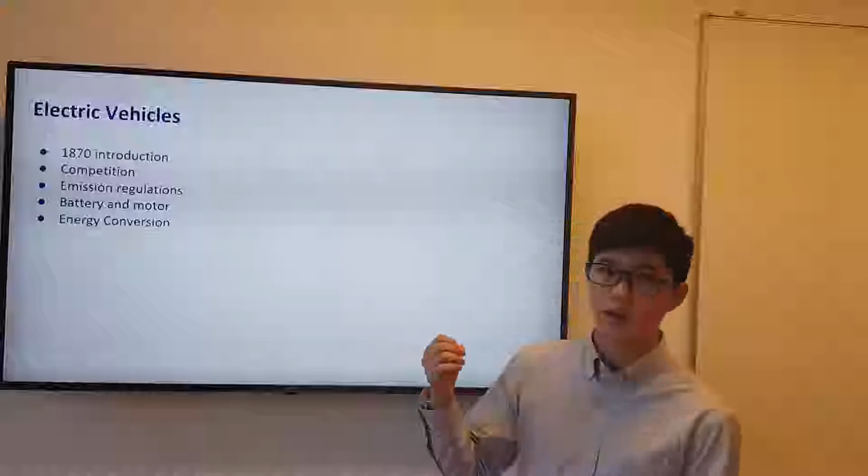Electric vehicles were introduced around 1870, and as the automotive industry became more packed, companies had to find a way to stand out, so they started innovating, leading to the production of electric cars. Add to this the fact that CO2 emissions were increasing, and governments were putting regulations on carbon dioxide emissions.

Electric vehicles run on a battery, and this battery powers an electric motor which then drives the wheels. It can be thought of more as an energy conversion system where the chemical energy in the battery is transferred into kinetic energy, driving the electric motor, driving the wheels.

It's also important to note that full electric vehicles weren't always present. It started off more as a hybrid, which is a combination of internal combustion engine as well as battery operation.

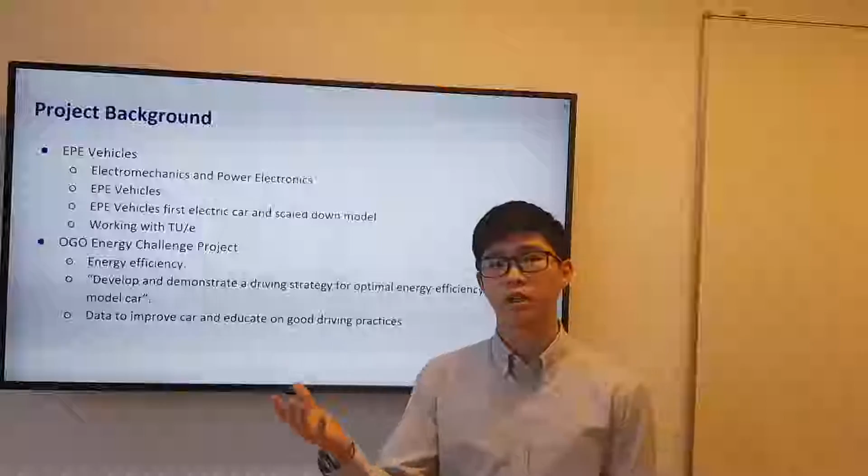This leads me on to our project background. So we have EPE and we have EPE Vehicles. EPE stands for Electromechanics and Power Electronics, and they are our host for this project. EPE Vehicles is a car manufacturing company and the customer of EPE.

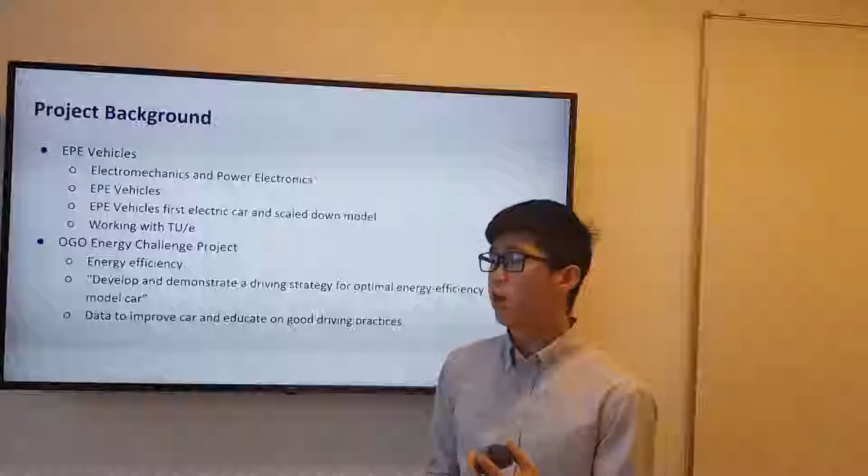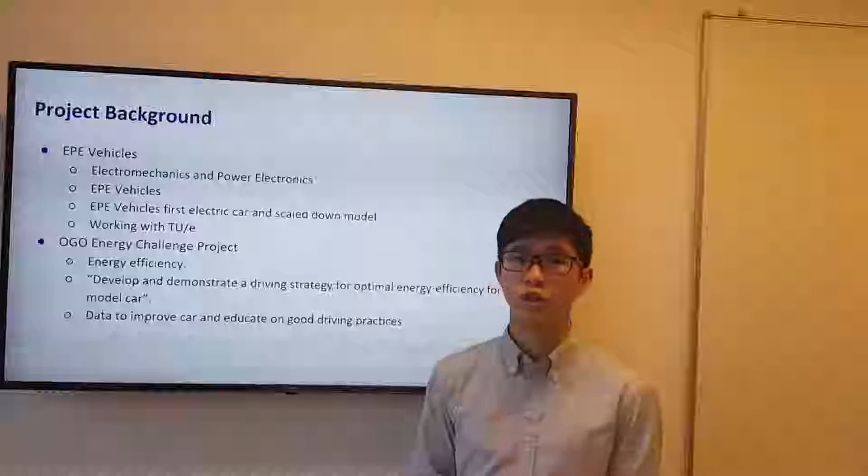EPE Vehicles has decided to produce their first electric car, and because this domain is new, the Chief Technical Officer, the CTO, has decided to produce a scaled-down model for testing purposes. Furthermore, the CTO has decided to pair with Eindhoven University of Technology, that's us, to research the energy efficiency of the car and driving practices.

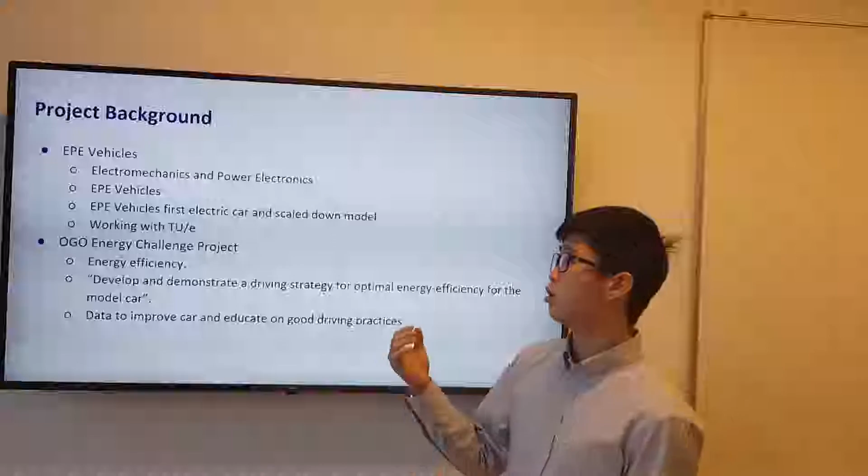So what is this energy challenge project all about? As the main selling point of our car is energy efficiency, our project goal is to develop and demonstrate a driving strategy for optimal energy efficiency for the model car. Using this, hopefully with our research, we can provide data to EPE Vehicles on ways they can improve the energy efficiency of their car, as well as educate them on good driving practices on the road.

As this is a very big project, we have decided to split it up into many departments, with each person having 2 to 3 roles. We feel this is important because each person will be able to concentrate on those roles and perform them well. Each department will have only 2 to 3 people, and we feel this is important because it maximizes communication.

To keep up to date, we have weekly meetings where we stay updated on progress. We talk about things such as what we've done in the previous week, any problems, we update our goals, and discuss ways in which we can fulfill this project. We also do peer reviews, a way for each individual to review how well they're doing.

So onto the content of this presentation. We start with the tank-to-wheel analysis. We have the communication system, the speedometer and LED system, and the driving strategy.

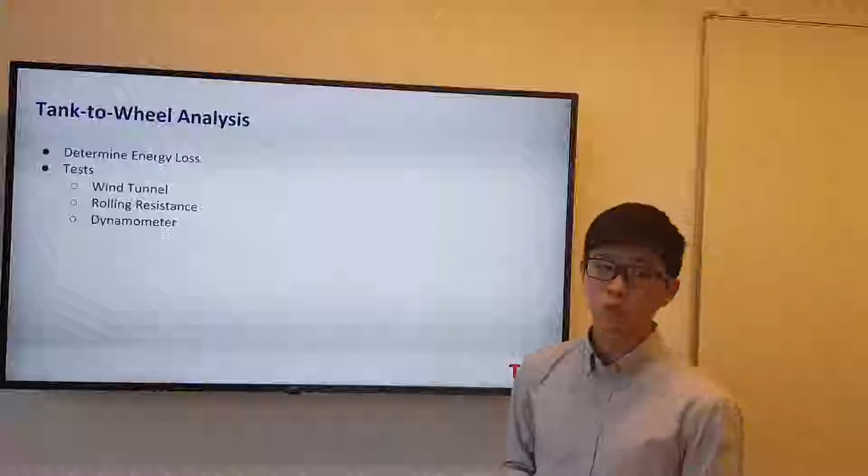The tank-to-wheel analysis is basically the determination of the energy losses of each part of the car, as well as the total loss of all components of the car. To do this, we have broken it down into 3 tests.

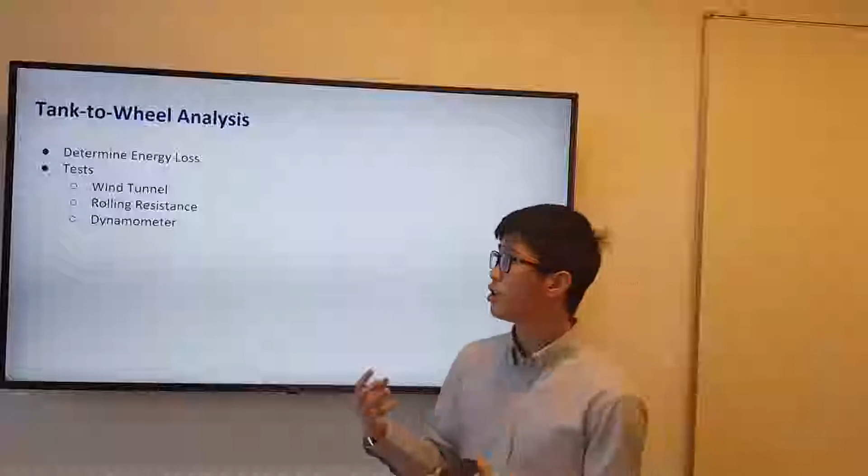First, we have the wind tunnel test, which measures the aerodynamic drag force on the car. We have the rolling resistance test, measuring the rolling resistance of the car, and the dynamometer test, which measures the efficiency at each velocity the car is traveling at.

Next, we have the communication system. On the day, the car will be communicating with toll booths on the road, and it will do this via infrared signals.

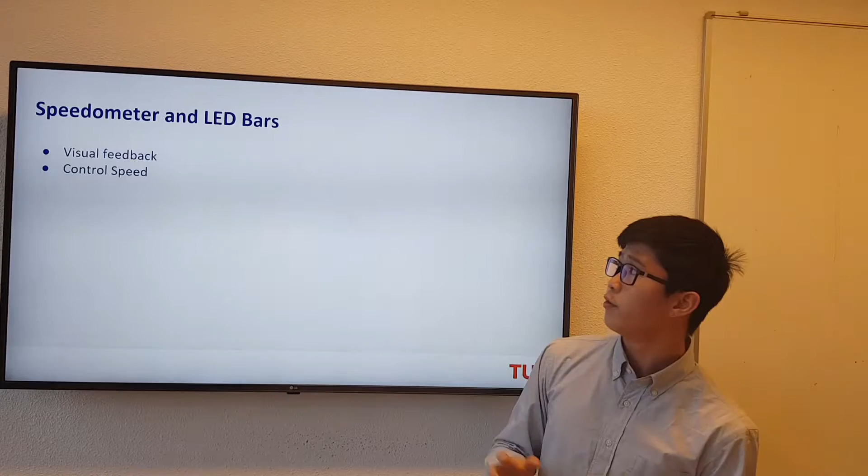Next, we have the speedometer and LED bars. The speedometer will give us feedback on which speed we are going at, and this is important because during the driving strategy, we want to control the most optimum speed we can function at. The LED bars will give us a visual representation of how far away we are from the optimal speed.

Putting everything together, we come up with a driving strategy, a way to drive the car on the day. This factors in things such as resistive forces, the speed of the car, the most optimal speed, the track layout, as well as how much throttle or brake we are using.

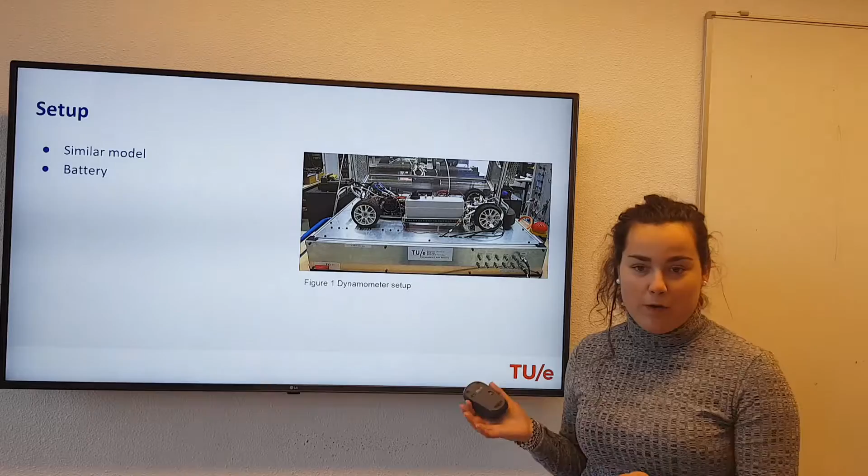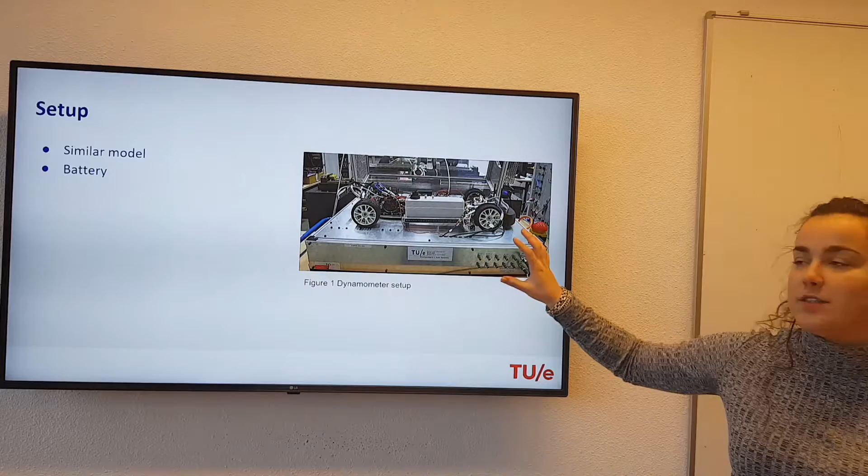The setup: it's not our own car we are testing, but a similar model. It's standing stationary and the front wheels are on a roller bench. There's also a battery connected to measure the voltage and the current.

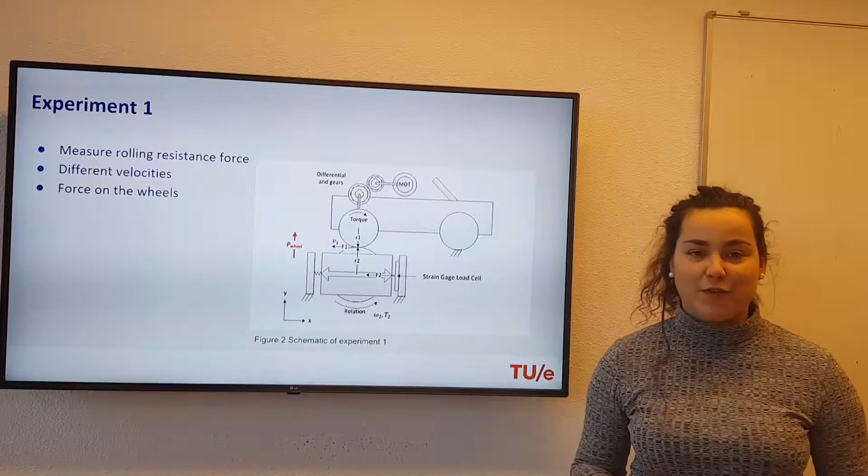In the first experiment, we are measuring the rolling resistance force with different velocities, and then the roller bench is rotating at different velocities.

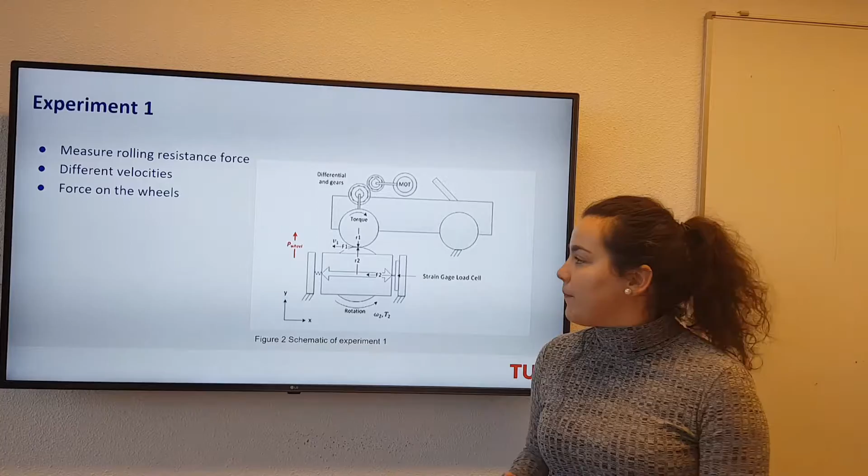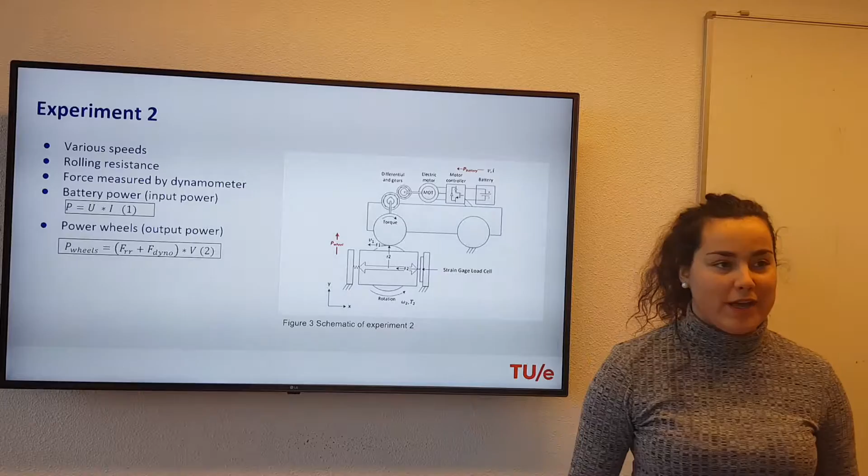And the battery power, which is the voltage times the current. And the power of the wheels, which we can calculate with the formula of the resistance force and force of the dynamometer, and the different speeds we've measured. So we get both, two powers: the power of the battery and the power in the wheels.

Now in the third experiment, we are calculating the power of the battery. And there's a kind of power loss, which is the auxiliary power, and this is measured when the car is not moving, it's stationary.

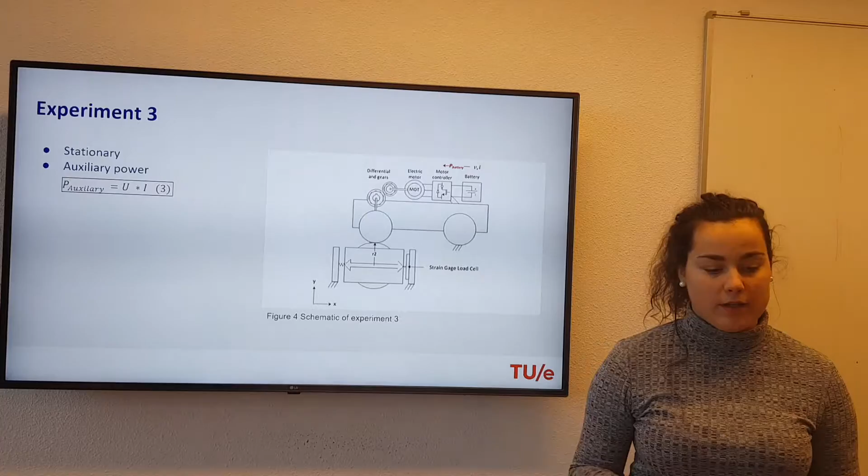Now our calculations and results. The power of the motor can be calculated by the power of the battery minus the power of the auxiliary. The power of the wheels can be calculated by the resistance force plus the force of the dyno, times the velocity. And then with those two we can calculate the power of the wheels divided by the power of the motor, which gives us the efficiency.

All equations have numbers, and each equation has a different number.

Then our results. We made a road load model in MATLAB to calculate the powers, and we need velocity. We use every velocity 3 times, with each time having a different road load.

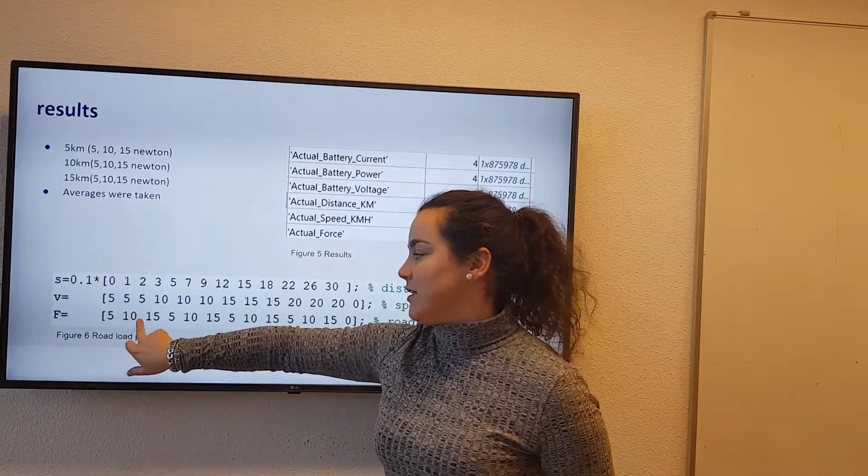We did that, and then we got the results in MATLAB. There were a lot of results, more than 100,000. And we took the averages of the results.

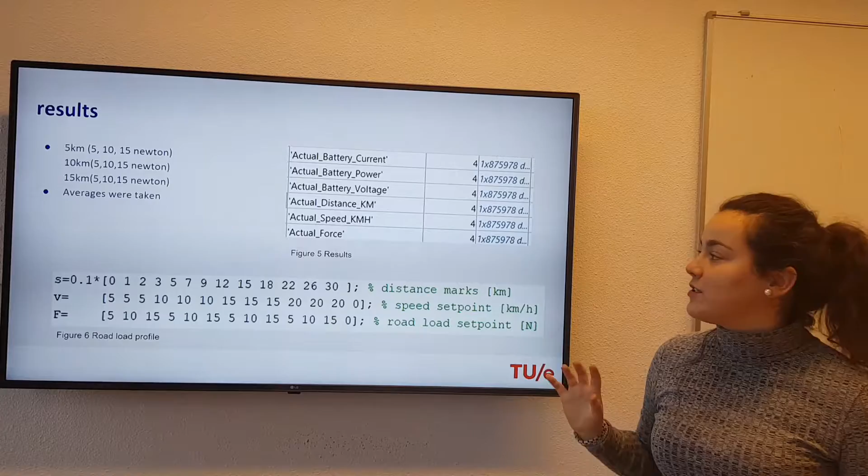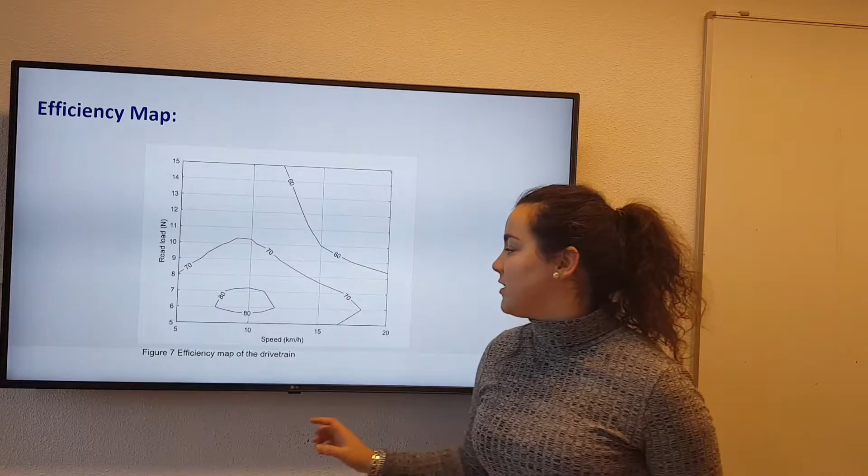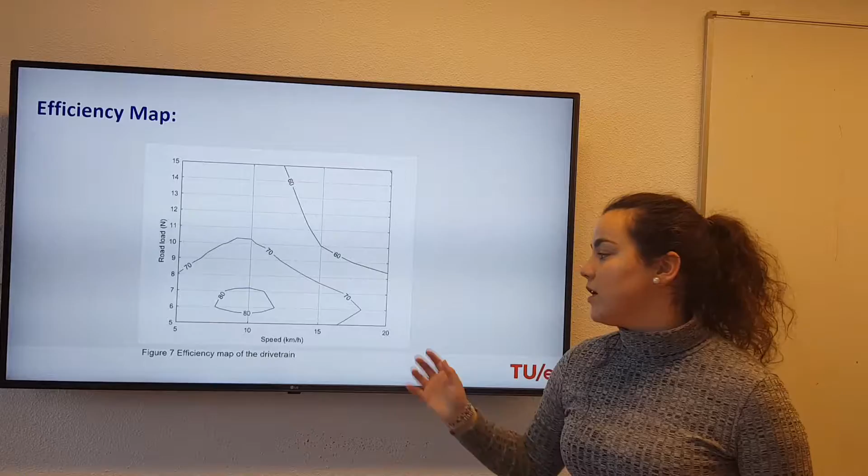With all the averages and everything, we measured the road load and the speed. We made this efficiency map, showing speed and road load. As you can see in this area, at a speed of 10 km per hour and a road load around 5 to 6, it's the best, so it's most efficient to drive at 10 km per hour.

Now Gerbrand will tell you something about the wind tunnel.

I'll tell you something about the wind tunnel. I will first talk a bit about the setup, then about which constant we are going to calculate, which we have calculated, and about our results.

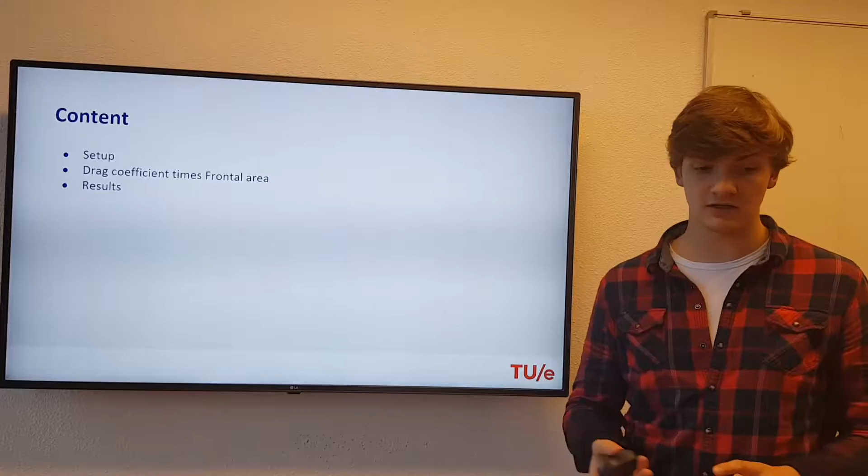The setup consists of a swing which is within the wind tunnel. There is a car placed upon the swing, which is the car we will be working with. The swing is connected to a force sensor, which measures the drag force which the car experiences due to the airflow. The airflow speed is measured as well, and with those values we can calculate the drag coefficient times frontal area.

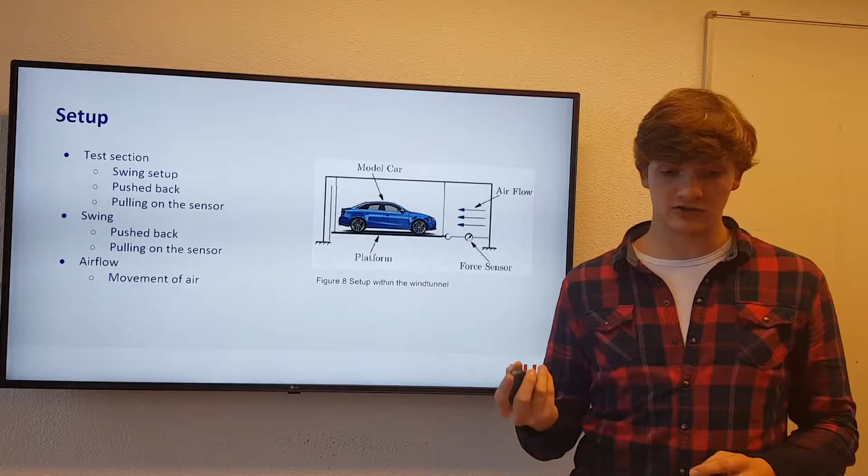The equation for drag force is half times the constant of drag times the frontal area of the car times the density of the air times the speed of the airflow squared. This can be rewritten so that the constant of drag times the area is equal to some variables which we will be able to get from the experiment.

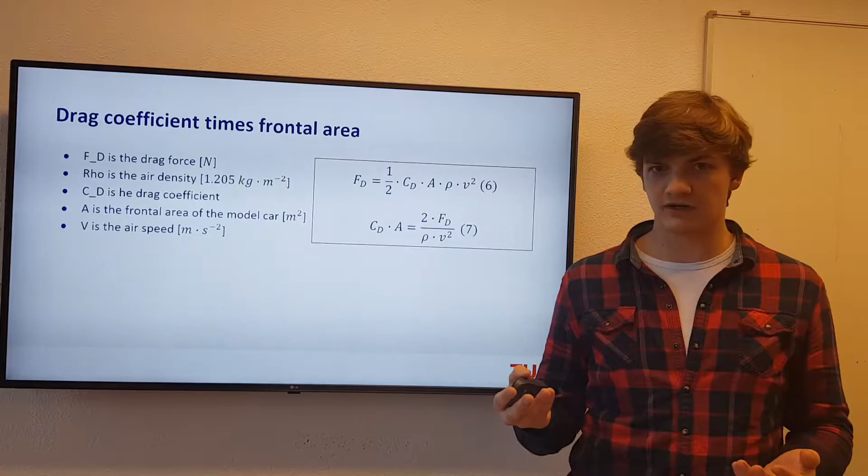We will calculate the constant of drag times the area, since they're both constants, and in our opinion this is the most accurate way to determine those constants, because otherwise you have to determine the frontal area using a picture or something else, and this is due to our measurements.

For our results we have 4 different setups. Setup 1 consists of a base car with a front and rear wing, floor and wheel covers. Setup 2 consists of a base car with front wing, floor and wheel covers. Setup 3 is just the base car with floor and wheel covers, and setup 4 is only the base car.

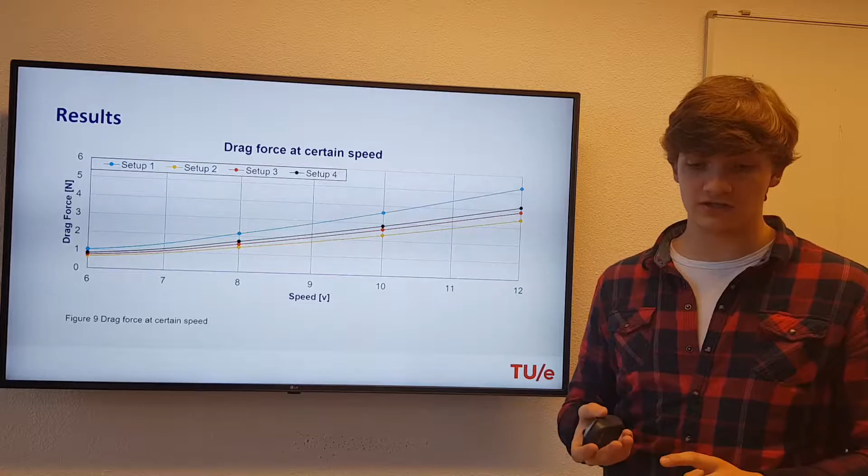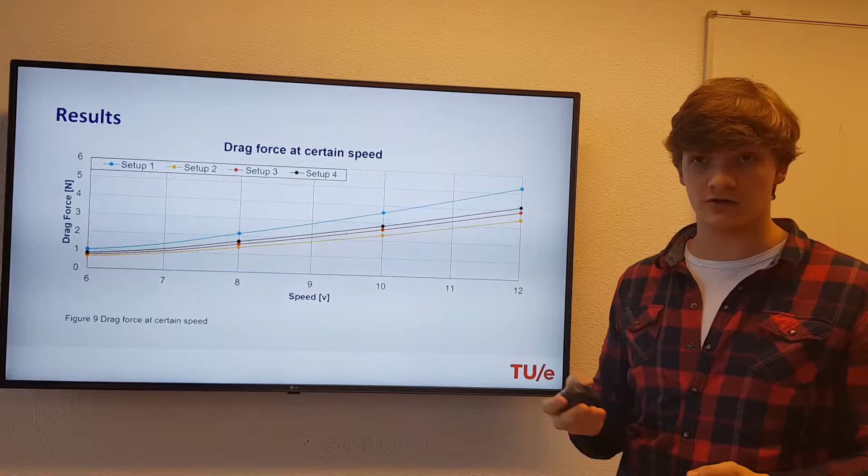From this graph you can see that setup 2 has the lowest drag force, and therefore is the setup we are going to use in the end results in the test. And then the rolling resistance will be explained by my teammate. So yeah, I'll be telling a bit more about the rolling resistance and the communication systems. I'll first talk about the rolling resistance and how we tested it.

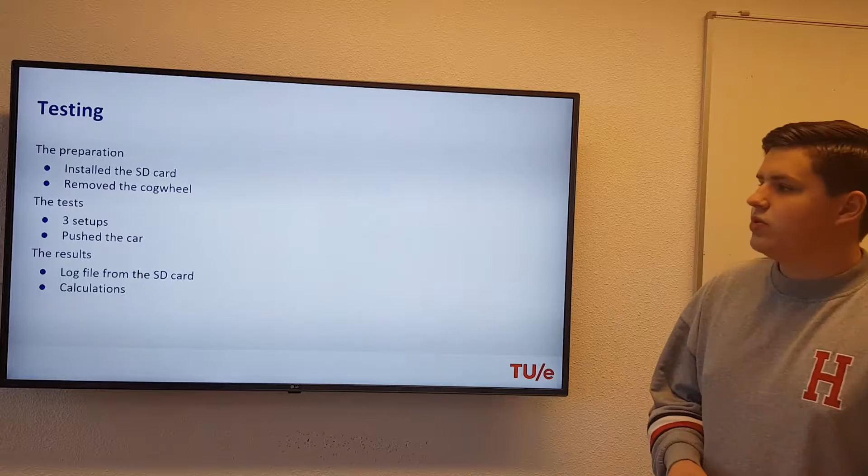So during our testing, we first had to do some preparation. We had to prepare our SD card and then install it. We also thought we had to remove the cogwheel ourselves, but it was already removed, so it came in handy. Then we did a few tests. So we did 3 setups: one with the cogwheel attached and no body, one without cogwheel and no body, and one without cogwheel and the body attached.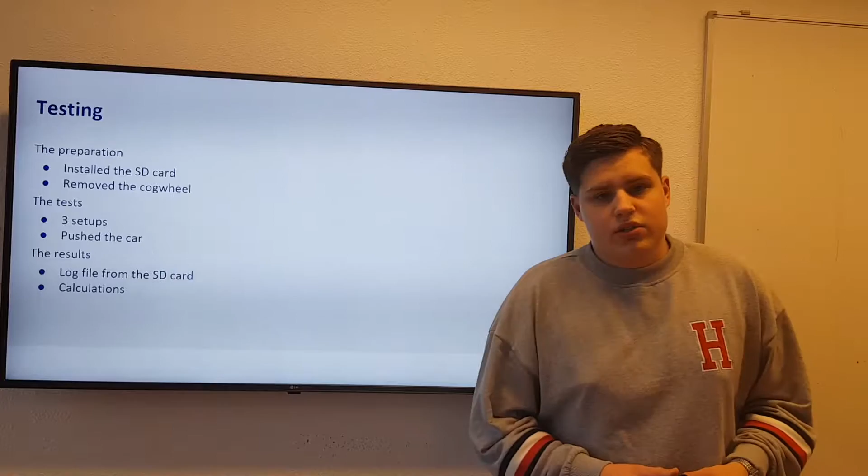And during the testing we basically just pushed the car around, waited for the program to finish, and then did it again. And then we had the results, we had to get them from the log file, and after each setup change we had to get the results on it. And then afterwards we had to do some calculations.

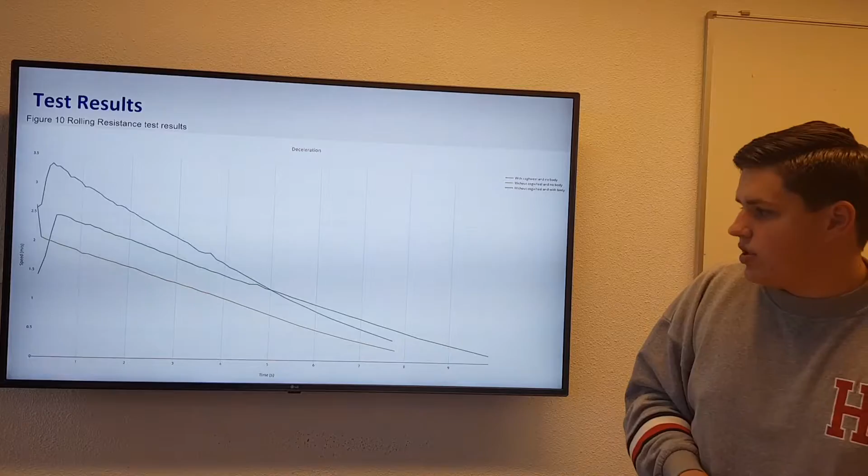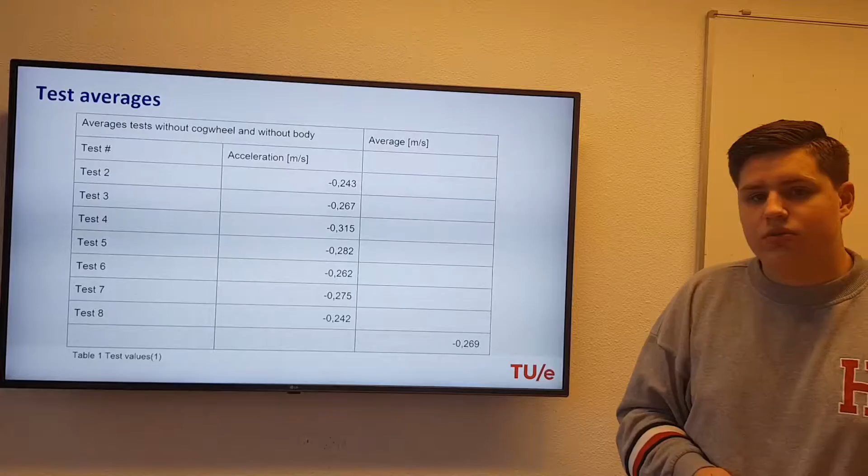And then we have the test averages. So for without the cogwheel and without body we did 7 tests in total. And as you can see, the average acceleration in meters per second is 0.269. Then we did 5 tests without the cogwheel and with the body attached.

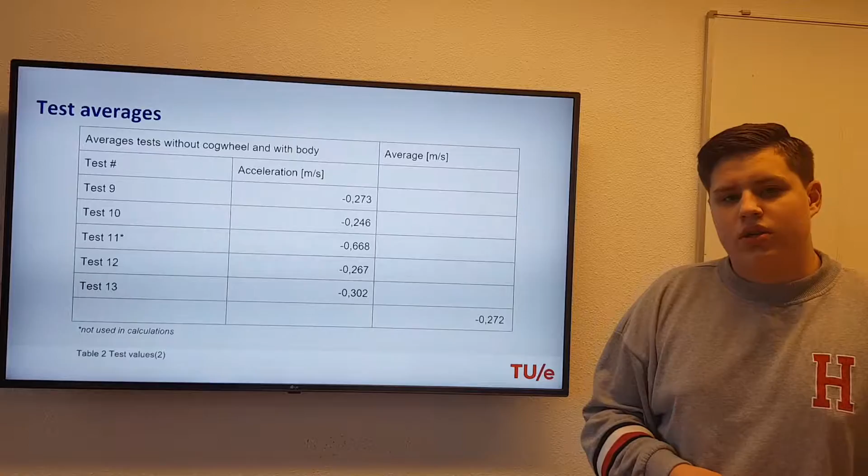One of them we couldn't use because we used to push the car on the LED bar, but now the body was covering that up. And during the initial stages of pushing the car, it changed direction suddenly, and that's also why you can see it's a lot higher than the rest of the measurements we took. So that's why we also don't use it in our calculations.

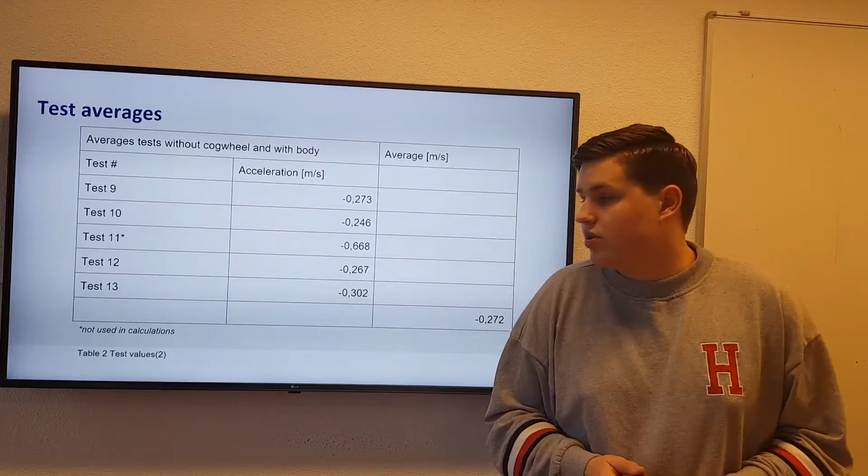And then we have the 4 final tests. These are the ones with cogwheel and without body, and we will probably be using this average to calculate our rolling resistance, because this is closest to the real setup on the test day.

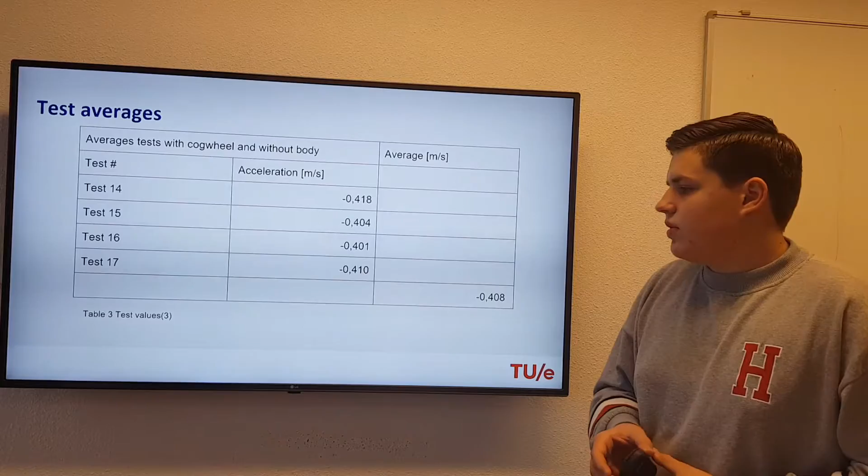And here you can see our calculations, and we basically neglected air force because we are at such low speeds, and the drag wasn't calculated at our speed, so we couldn't use it. We used some of the higher speeds, but the differences were so small that we thought they were negligible, so that's why we didn't use them. And as rolling resistance coefficient, we were probably using 0.0416, because that's the one without the body and with the cogwheel attached.

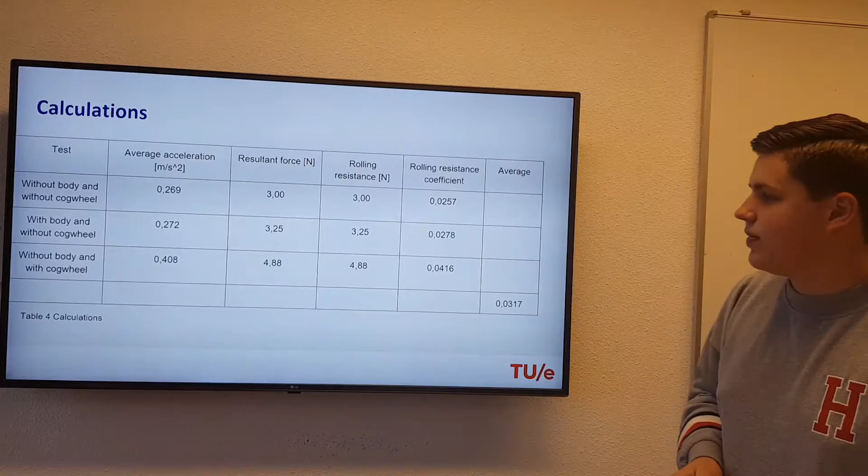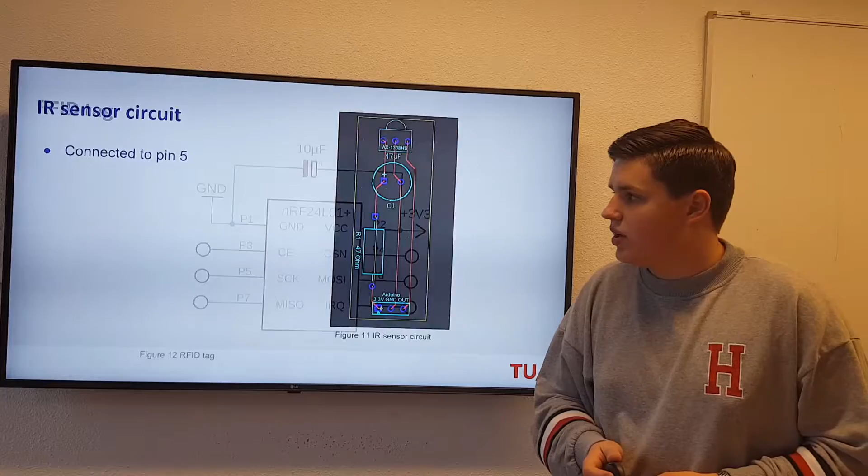Then we have the RFID tag. It's also connected with a 3.3 volt and a ground to the Arduino board, and pin CE and CSN are connected to pin 11 and 10 respectively. And then we have the code.

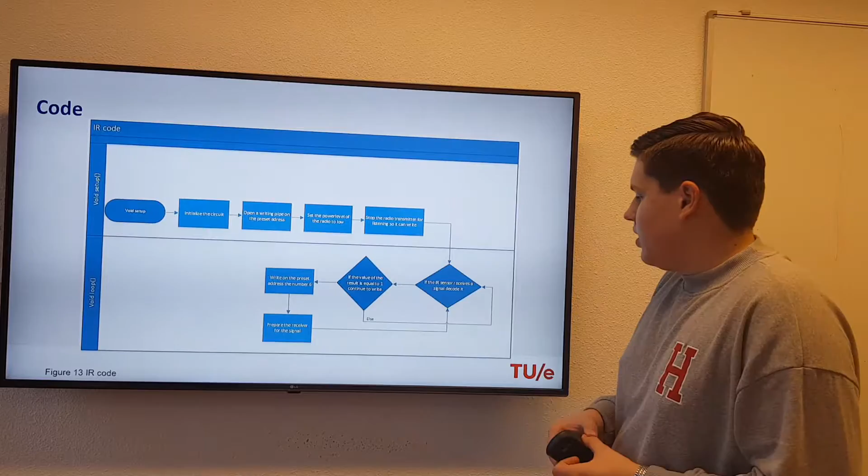So for the IR code, we first initialize the circuit, so that is initializing and enabling the RF transmitter and the IR sensor. And then we set the power level of the radio to low, and we stop the transmitter from listening so it can write. And then we have an if statement: if the IR sensor receives a signal, it continues to the next if statement.

That checks whether the value is equal to 1, and then it continues to write. So it writes on the preset address, which is already defined before the setup, within the initializing of the circuit, and it sends the number 6. And then we prepare the receiver for the signal.

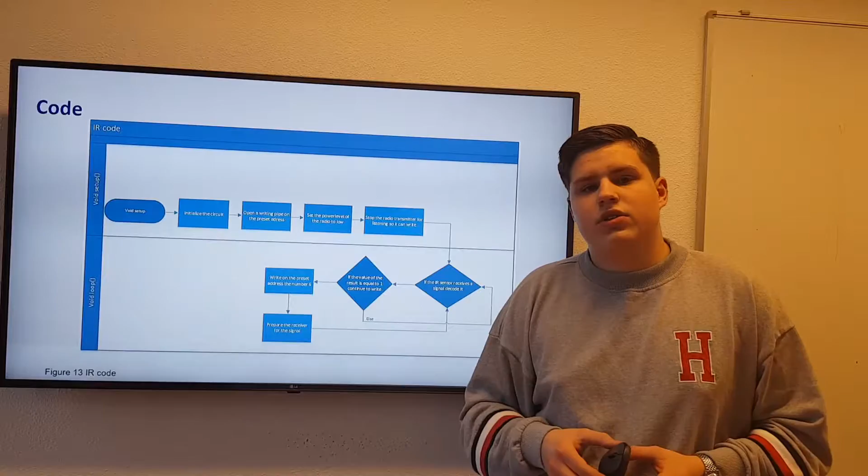We prepare the receiver for the next signal after it's sent, otherwise it will just keep on sending, and we couldn't be measuring the times and how many laps we've traveled already. And now Gerbrand will tell you a bit more about speed and the LED system.

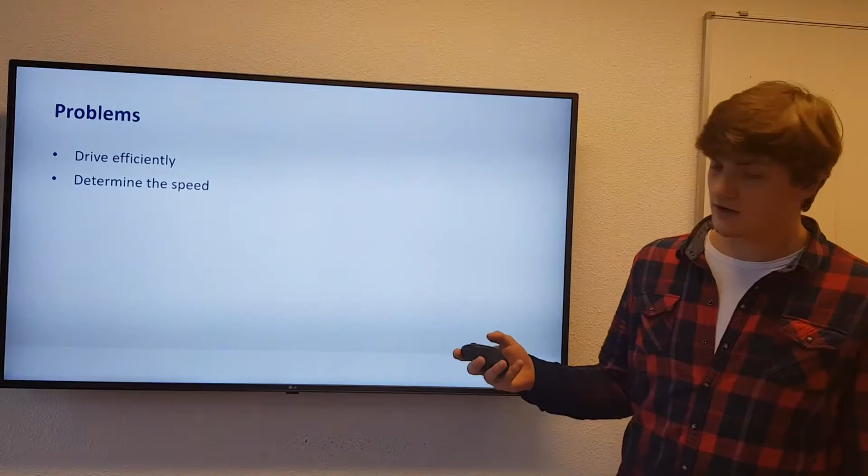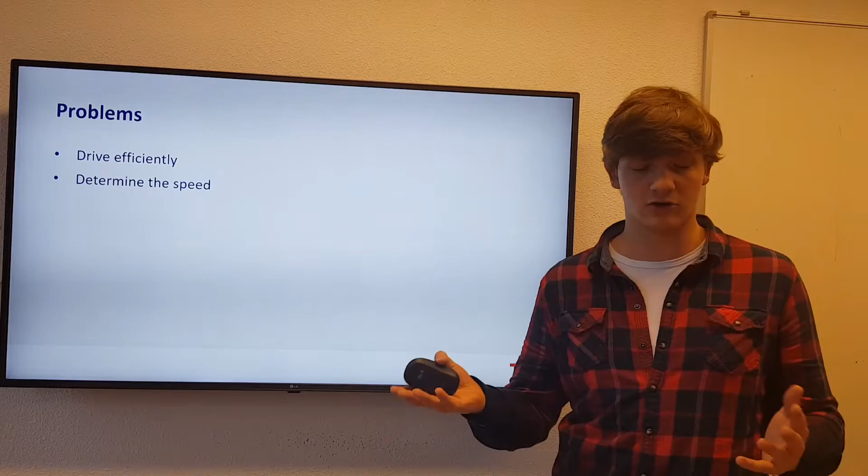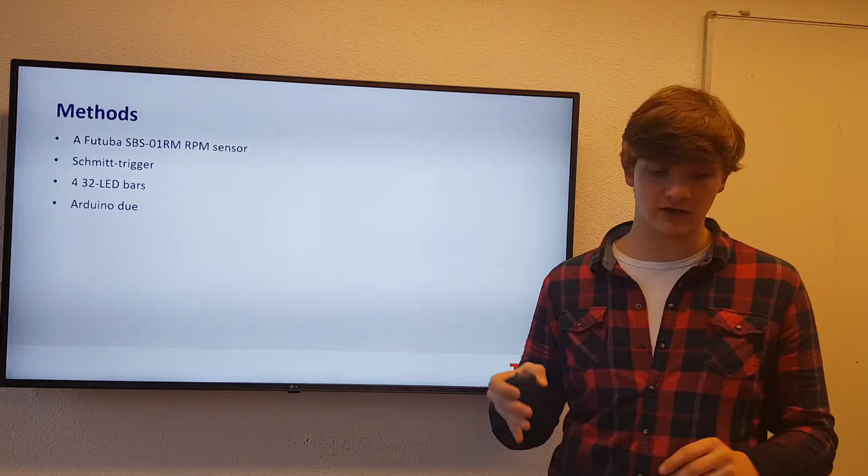The problem here is that we have to drive efficiently, at the most efficient speed. But we need to see how we can stay at speed. And for that we are using LED bars to show what speed we are driving at. For this we use a sensor which works with magnets on the cogwheel from the engine, a Schmitt trigger which makes a square wave from a variable wave, LED bars and Arduino.

Then there's the calculation we use in the code for the LED bars. We will calculate velocity with delta t, which is in milliseconds. The velocity will be calculated with distance divided by the time, which is in our case delta t. The cogwheel will turn 180 degrees before a magnet on the cogwheel reaches the sensor, because there are 2 magnets.

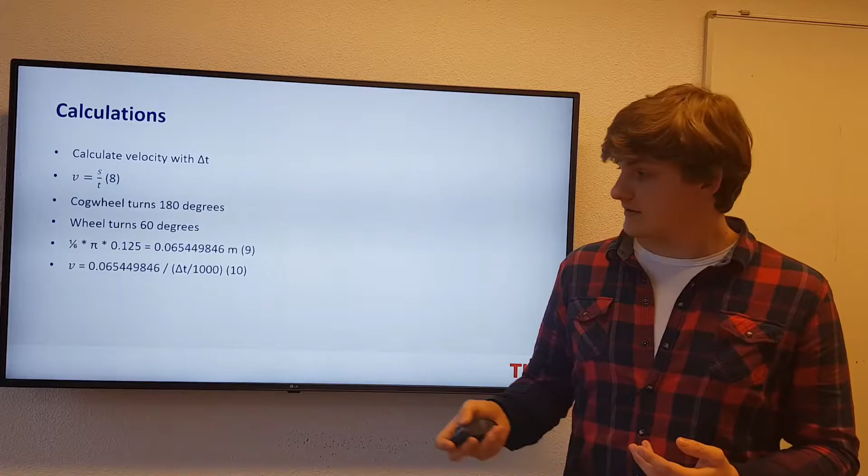And in turn we have determined that if a cogwheel turns 180 degrees, the wheel will turn 60 degrees. And with this we can calculate the distance the wheel travels every time a magnet passes the sensor. This is 1/6 of the circumference of the wheel, where 0.125 is the diameter of the wheel. And then the speed can be calculated with the distance traveled by the wheel divided by the difference in time in seconds. That's why we divide by 1000 again.

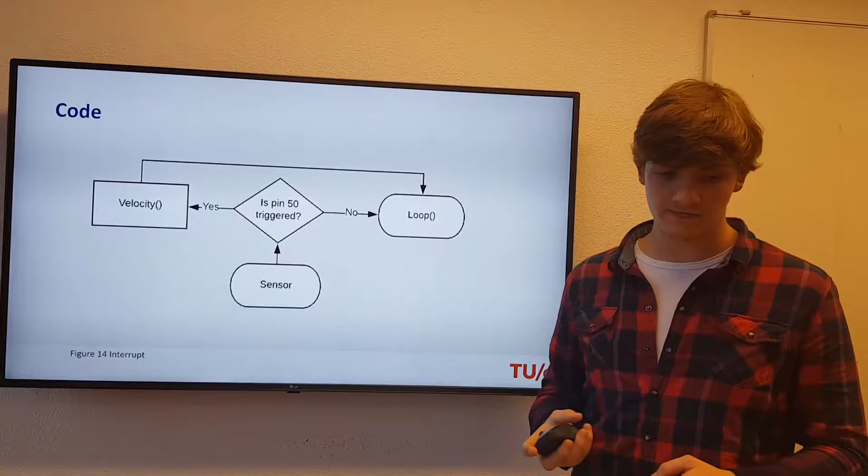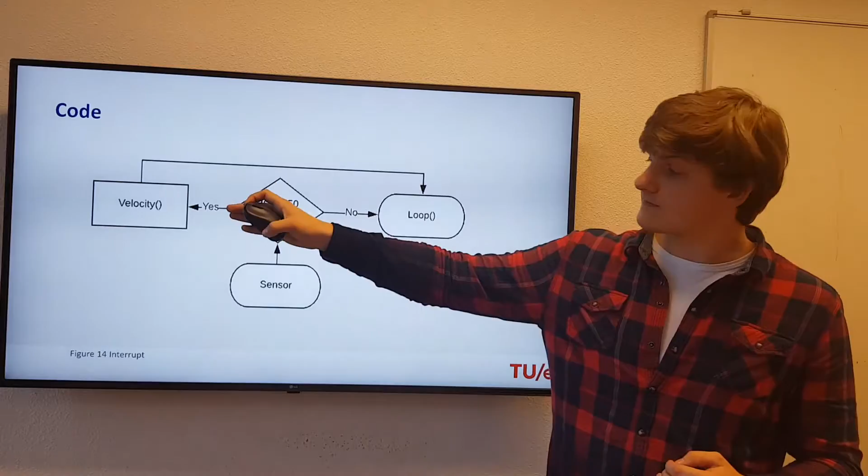And then the code. The loop here is the main code, and the other part here is the attach interrupt, as it is called in Arduino. It is interrupted every time the magnet passes by the sensor, then pin 50 will be triggered. And then the new velocity will be calculated. And then we will go back to the loop, otherwise you will stay in the main loop.

The velocity is calculated by the end time, for which we will use a function millis, which will calculate the amount of milliseconds that has passed since the last time the function has been called. And the delta t will then be the difference between the end time and the start time. And the start time will be 0, so delta t will also be the same as end time.

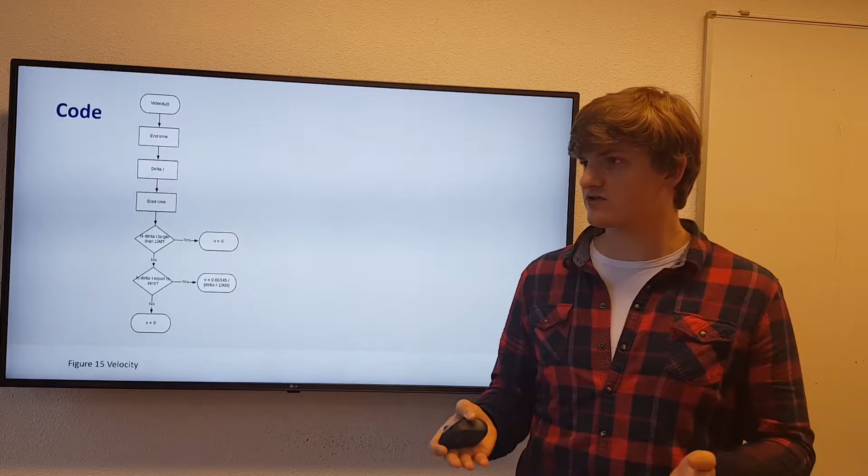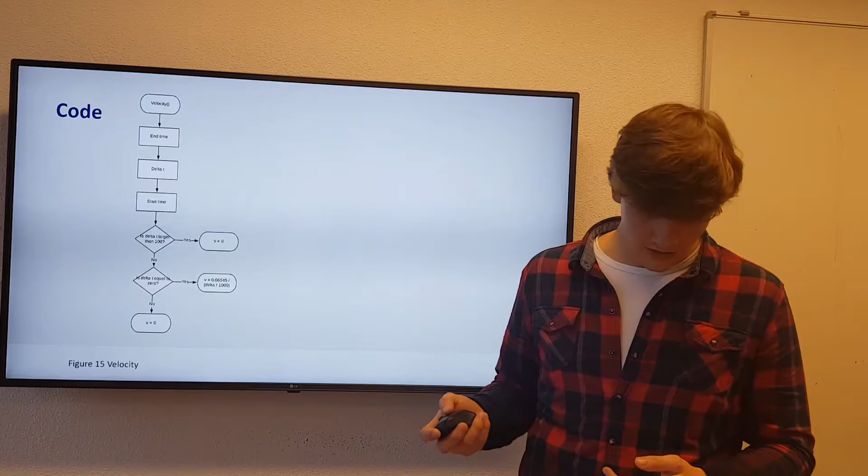And then with those steps we will just make sure that the car is moving, and if the delta t is larger than a certain amount, it probably ain't moving, and so the speed is 0. And if delta t is not equal to 0, then there is a speed we have given to it. And otherwise its speed is 0.

Then we go back to the main loop after the velocity, and first we print the velocity on the LCD screen on the car, which is useful for when we are doing measurements without driving ourselves, so we can see the speed in numbers. Then we do a small calculation to calculate the number of LEDs that need to turn on, determined by the velocity of the car. Then we will select the color of the LEDs, also determined by the velocity of the car. And then there will be a code function to turn a certain amount of LEDs on.

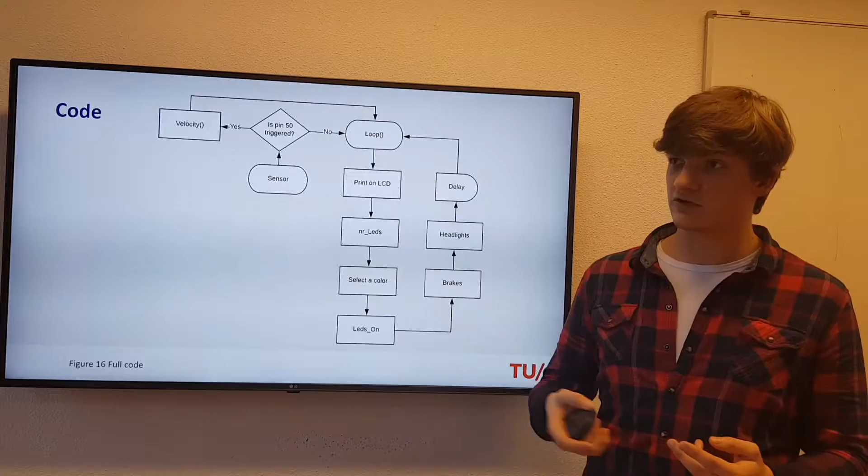After that, at the back of the car we have integrated brake lights. At the front there are headlights. Brake lights will only be on when the velocity is decreasing. And then there will be a delay before the loop starts again, because every time the LED refreshes there will be a white light, and if you don't put the delay in there, they will just keep on showing white light, because there won't be time to show the red, green or the blue light.

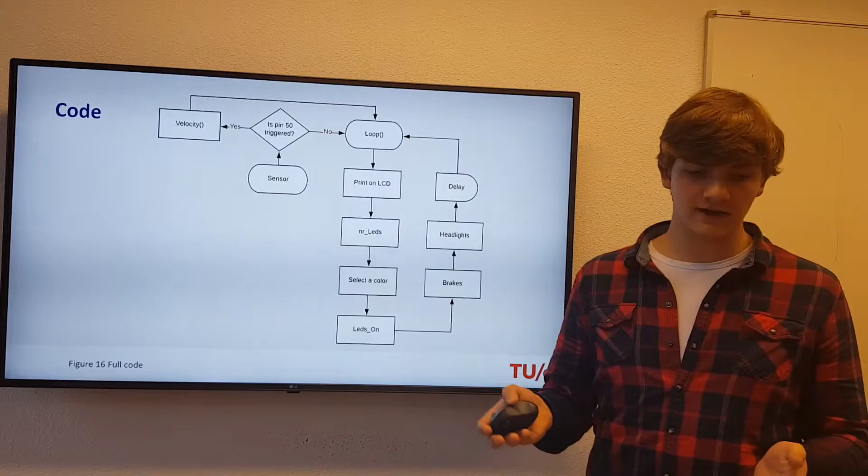The colors we are using are red for totally not efficient, blue is for near efficient speed but not quite there, and green is when you are in the efficient speed area. And then here's the code for putting the LEDs on.

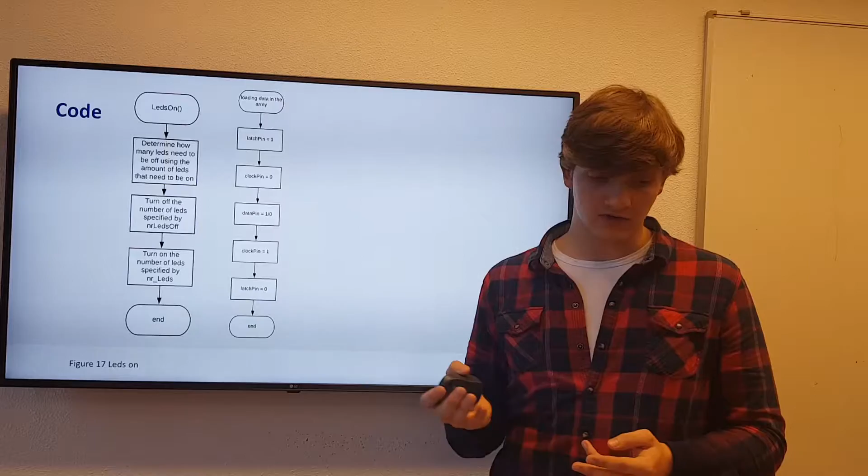First we will determine how many LEDs need to be off using the amount of LEDs that need to be on. So you do a small calculation of 32 LEDs on the bar minus the amount of LEDs that need to be on. Then you turn off the amount of LEDs specified by the amount of LEDs that need to be off, which is done by this part of the code. The LEDs can be seen as an array of 96 values, and every 3 values is one LED.

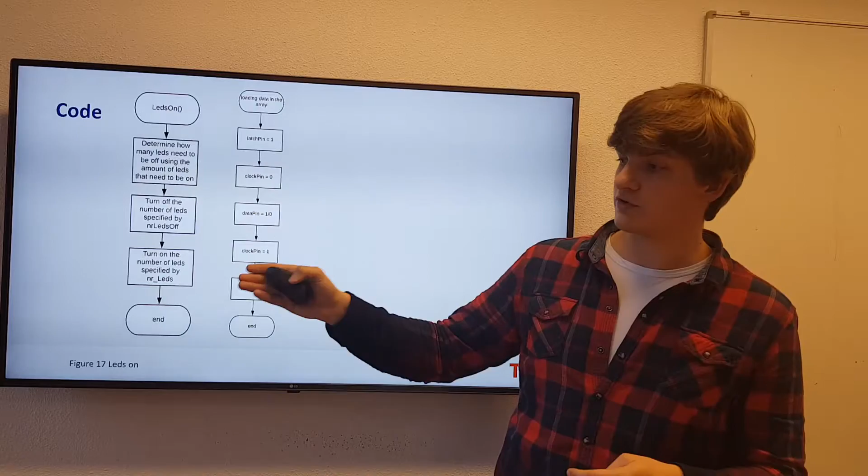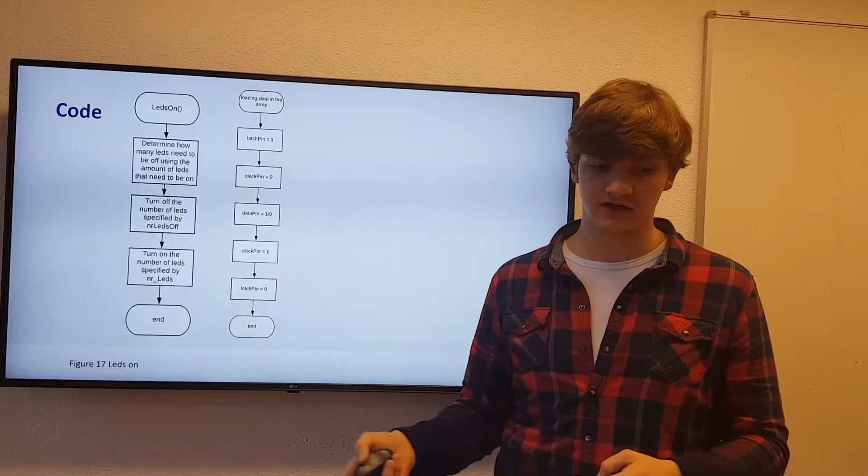They are the color red, green and blue, and you need to put every value to 1 or 0 to make sure that the LED is on or off. That will be done here. And for the off, the data pin in the loaded data array will be 0, because then you will put the LED off. And after turning LEDs off, the LEDs that need to be on will be turned on, and then the data pin will be 1, because then you will turn the LEDs on. And that's how our code works. And then Alex will explain something about the driving strategy.

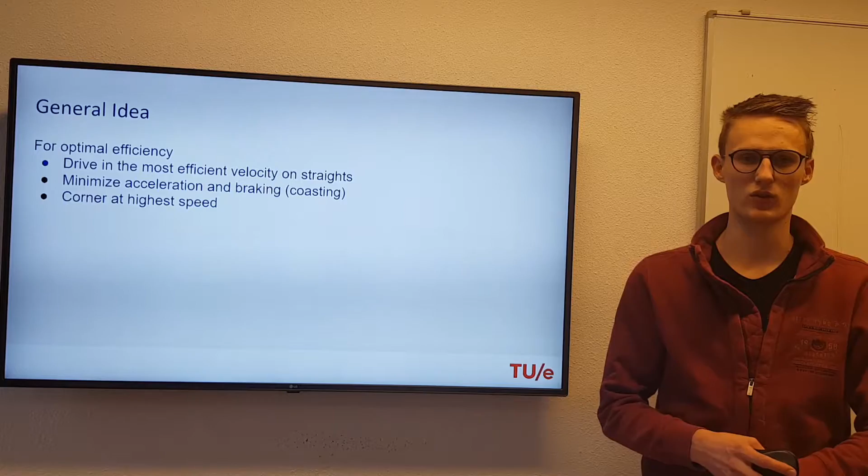For the driving strategy, a couple things are important. For the maximum efficiency, we need to know which speed is most efficient for the car. We want to minimize the acceleration and braking, so we can calculate, especially the braking, what's more efficient and what's not efficient. And we want to know at what speed we can take corners, because if we have to brake a lot for corners, then we lose a lot of energy.

For the most efficient speed, we're going to use the efficiency map from the dynamometer test. In the efficiency map, we can implement the forces that were measured at the wind tunnel test and at the rolling resistance test. If we add these 2 forces together, we can see the efficiency of the car at different speeds.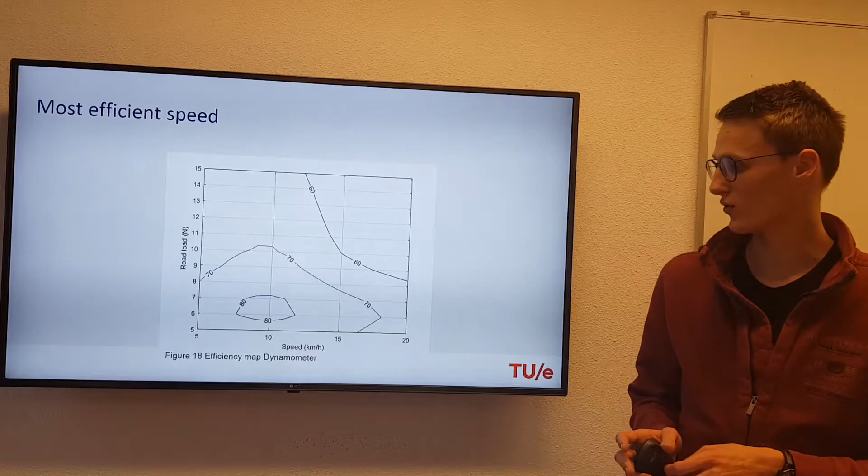When we were calculating for the most efficient speed, we looked at adding those forces, and we came at around 5 Newton that the car would be driving around the Forum. At 5 Newton you can see that it's closest to 80, around 9-10 kilometers per hour. So we say that that's our most efficient speed, and that is also calculated into the speed system.

For the acceleration and braking, the acceleration we can't really determine a lot, because we're only going like 10 kilometers an hour, and we reach this speed really quickly, so it's not a lot of difference if we do a max acceleration or accelerate gradually. But we think that we should just accelerate immediately, because then we are driving longer at the most efficient speed. So that would cost less energy than if we went gradually and had to brake again before we take a corner.

But we don't want to brake at all, because when we brake with this particular car, the wheels stop immediately. So we lose a lot of power before we get the wheels turning again. So we're going to use another method to brake, essentially. This method is called coasting. We're not going to press the brake at all, we're just going to let go of the throttle, and the car will decelerate on its own gradually. This will lose a lot less energy, and when we have the best speed to take the corner, we can accelerate again and go to the maximum speed again.

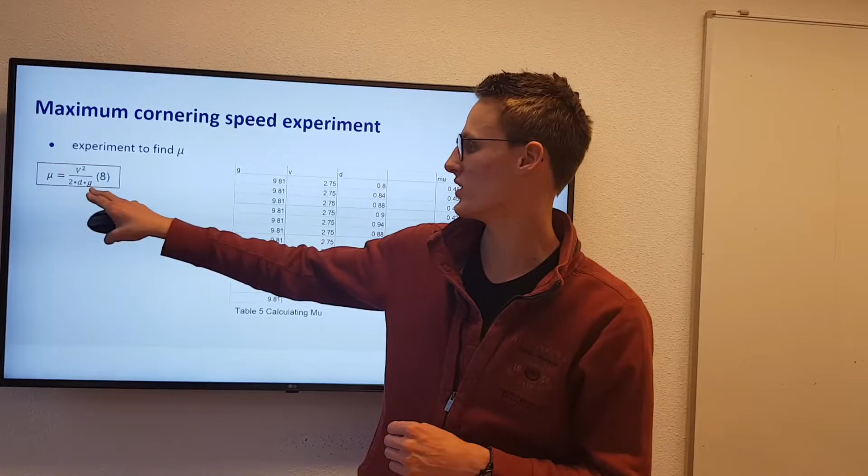friction. For this we have the formula mu equals the speed squared divided by 2dg. The d stands for the distance that the car has to travel, and the g is the gravitational constant. The gravitational constant is 9.81, it's not everywhere the same on the planet, and in the Netherlands it is exactly 9.81, at least that's what we're told.

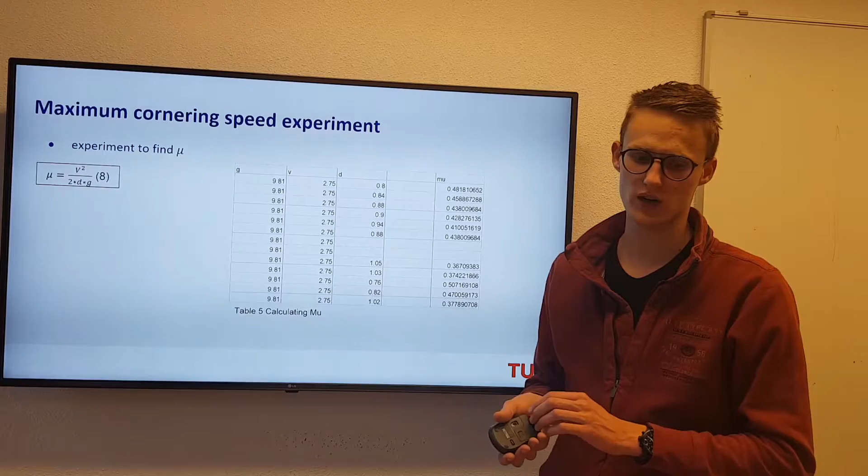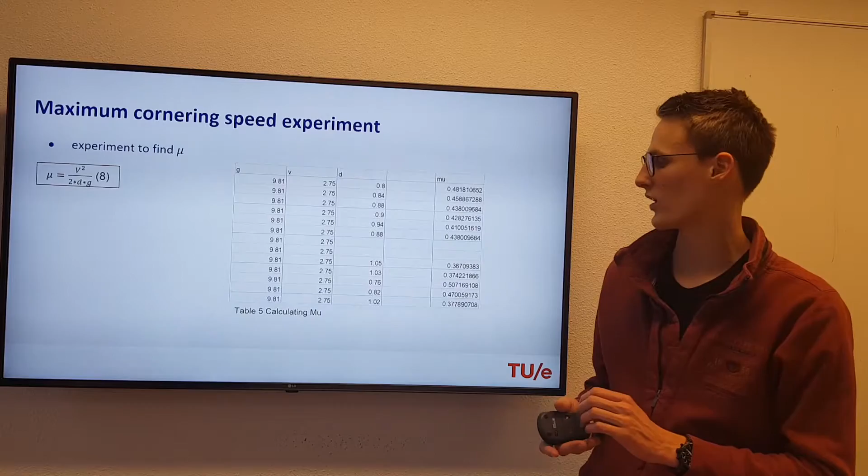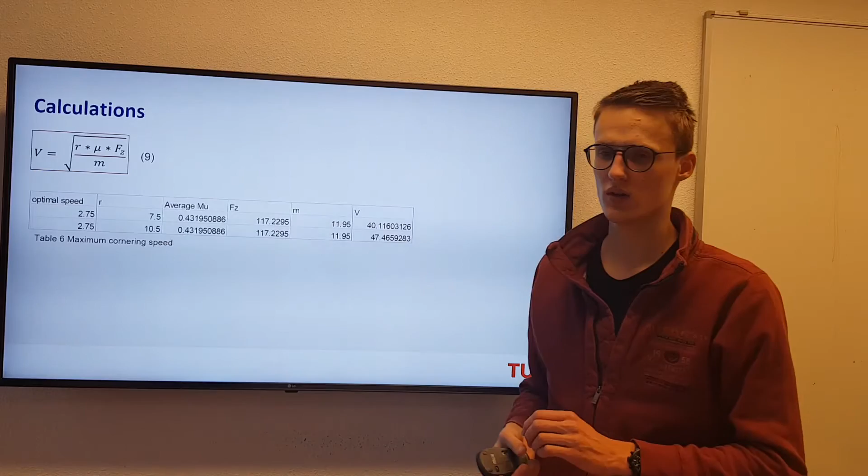From this mu we could take the average, and with this average we could calculate the optimum cornering speed. The formula that was used for this is the optimal speed equals the square root of r, the radius of the corner, times mu, the coefficient of friction, times the gravitational force, divided by the mass of the car. There are two radiuses of corners in the whole track. One is 7.5 meters and one is 10.5 meters, so we calculated them for both.

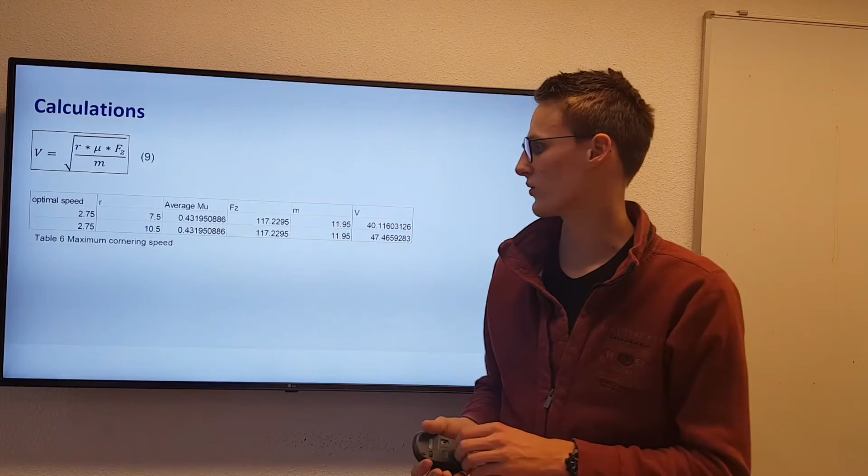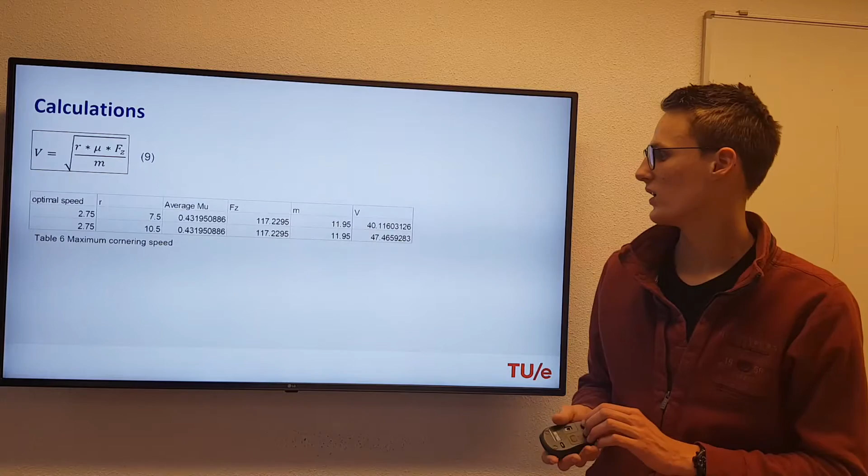The optimal speed we display here, that's 2.75 meters per second. The average mu is 0.43. The gravitational force is 117 newtons, and the mass is 11.95 kilograms. When we put all these values into the equation, we get that the optimal speed for taking these corners is 40 and 47 meters per second. This is really fast, so we can't do this.

So we're just going to stick to the optimal speed, because these numbers tell us that we can just drive around at the optimal speed for the whole track, and the only time we have to brake is for the toll system, because we have to wait there for 10 seconds.

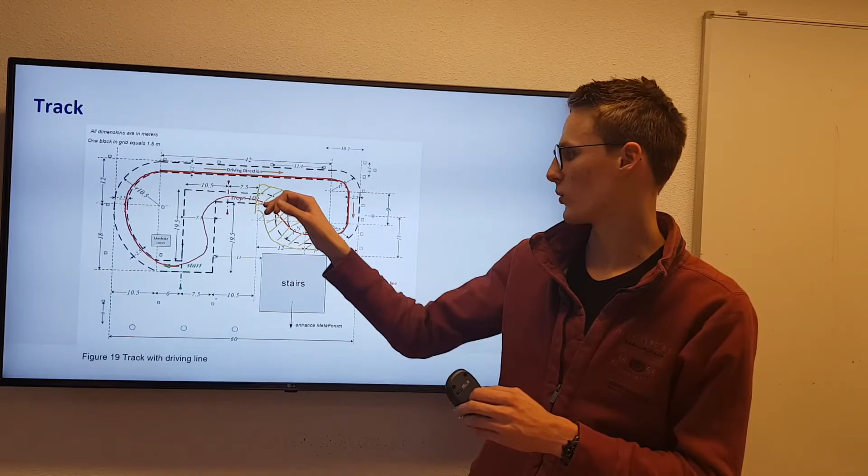This is the track. With my subgroup we drew the ideal line that we want to drive with the car. When we start here we hug the inside of the track all the way around until we get to the last two bends. Here we have to start coasting to stop before the line so the toll system can do its thing. We have to start coasting somewhere in this area, but we are not exactly sure, so we have to test this on the challenge day itself to see when we have to start coasting to stop with the least power lost.

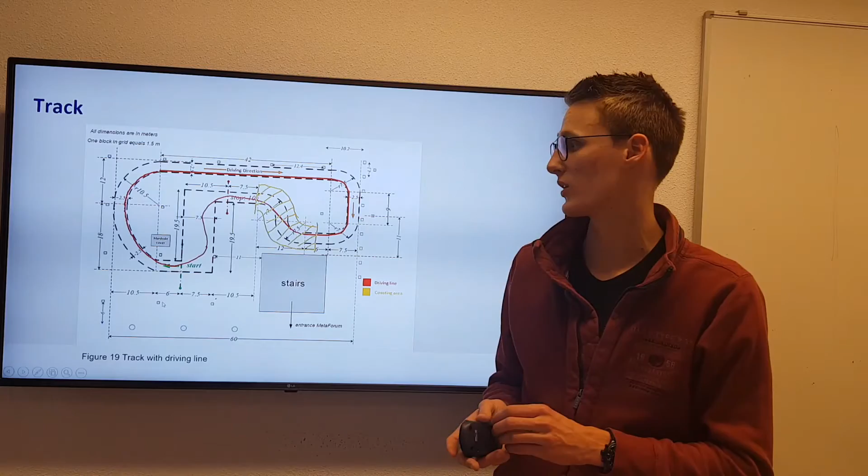We can use some of the brakes to stop if we're going too fast, but we would rather not do this. And after we stop we can just accelerate and take the corners and do the lap again. We have to do the lap 5 times and then we just have to stop.

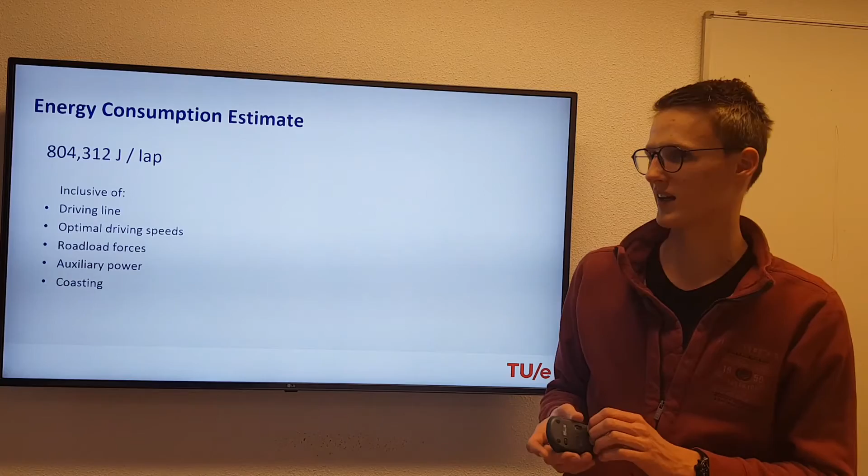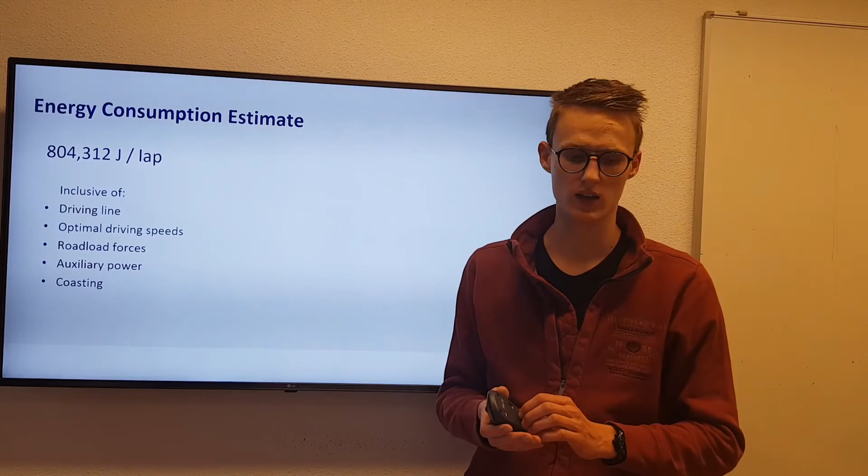And we also calculated the energy consumption that we think the car is going to use per lap. This is 804,312 joules per lap. This includes the driving line, the optimal driving speed, the road load forces, the auxiliary power and the coasting. So this should be a really accurate guess, but we're not really sure because we could have messed something up in one of the tests, but we'll find that out on Thursday.

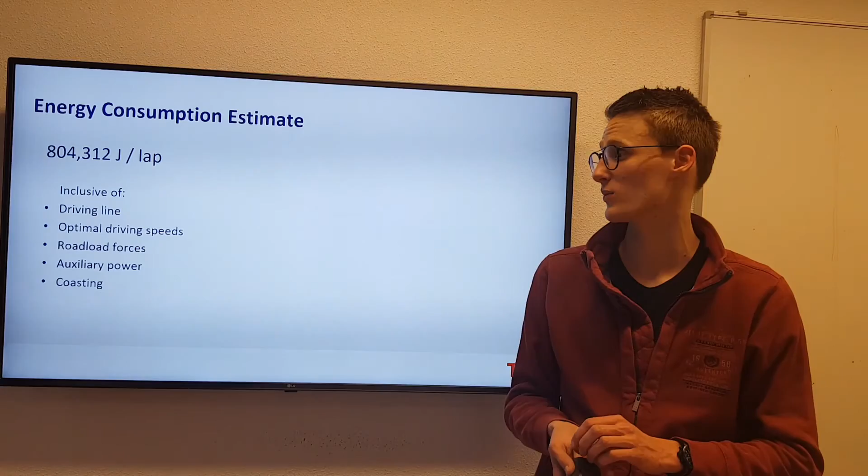And now Andrew will finish this video. Thank you, Alex. So for the final remarks of this presentation, I'd just like to give a status update.

So throughout the past few weeks, our team has been working very hard, and we have completed research on the tank-to-wheel analysis, and we've done tests on the wind tunnel, the rolling resistance, and also the dynamometer. We also have a functioning communication system and a speedometer and LED bars. For outstanding goals, we still have to do the final report, our individual abstracts, the peer review, and of course the challenge day itself.